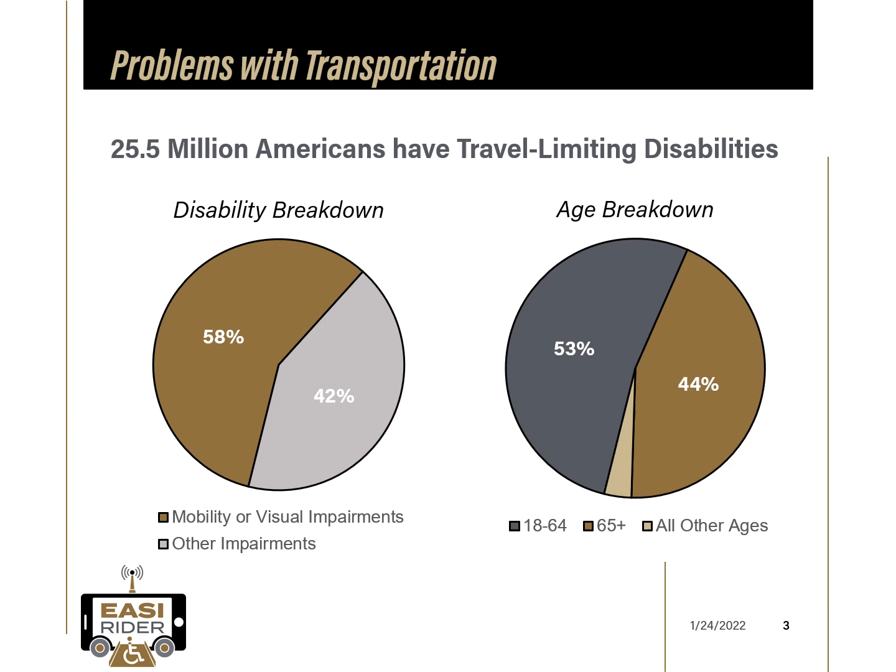There are 25.5 million Americans with travel-limiting disabilities. About 60% have difficulty traveling due to mobility or visual impairments. Both working-age adults and the aging population have difficulty with travel. The EASI RIDER project focuses on these demographic groups and what design solutions are needed to allow them to be independent users of future AV technology.

Autonomous driving technologies are the future of transportation, but they also present a lot of challenges in providing people with disability complete agency to this technology. We are grateful to work alongside the other teams to develop inclusive design solutions that will allow people with disabilities to independently travel wherever they need to go.

Our mission was to create an inclusive design that encompasses the entire travel experience for passengers with disabilities. This includes locating the AV, entry and egress, user-aware parking, configurable wheelchair securement and seating, independent operation of vehicle controls, and remote supervision for emergency situations.

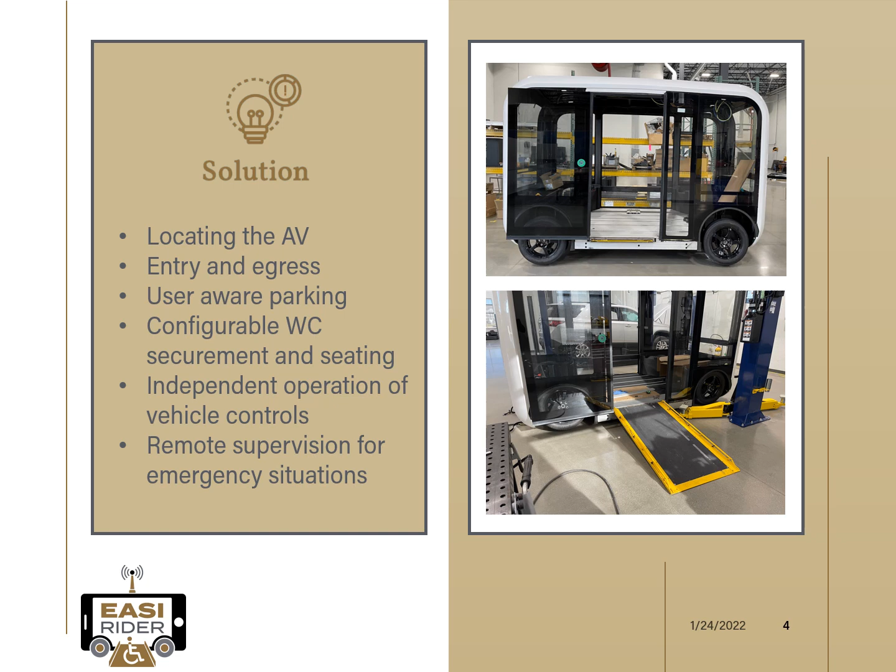To best achieve this goal, we are building a full-size AV platform with operational wheelchair-accessible door and ramp, smart seating, wheelchair securement system, multi-sensory operational controls, and state-of-the-art monitoring systems. The images on the right show the current progress of the AV. We have enlisted multiple partners to help us develop these inclusive design solutions, including industry members interested in improving mobility of persons with disabilities and nonprofit organizations serving the disability community.

There are 3 phases in our user-centered design feedback strategy. Phase 1 involved getting early feedback regarding AV usage among members of the BraunAbility Driving Force. The Driving Force was developed to answer different questions in regards to disability transportation. This survey was conducted in early 2021. From the survey, we found people with disabilities were more receptive to using autonomous vehicles than the general public. They also suggested specific design considerations that they thought were critical to incorporate into autonomous transportation.

Phase 2 is a targeted Qualtrics survey that we recently released to groups and individuals with disabilities or their caregivers. It was developed to inquire about their current usage of technologies intended for AVs and specific design solutions that we were considering. Additionally, we inquired about their current attitudes and expectations towards AV technology. The data collection for this survey is still ongoing, and a link is provided at the end of the presentation if you would like to participate.

During Phase 3, we will be conducting in-person focus group testing at the newly built BraunAbility Innovation Center in Carmel, Indiana during spring 2022. We are inviting key stakeholders, wheelchair users, and persons that are blind or visually impaired to personally test the different design features of our real-sized EASI RIDER AV platform that is currently under construction. These focus groups will allow us to better understand each individual's unique challenges during different travel scenarios. The following animations will show an overview of what the current design incorporates.

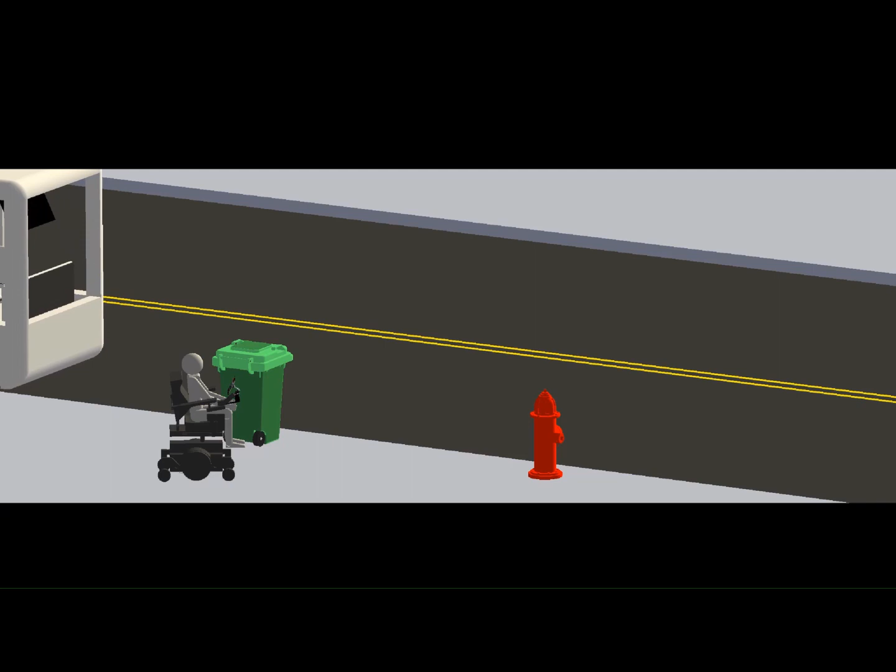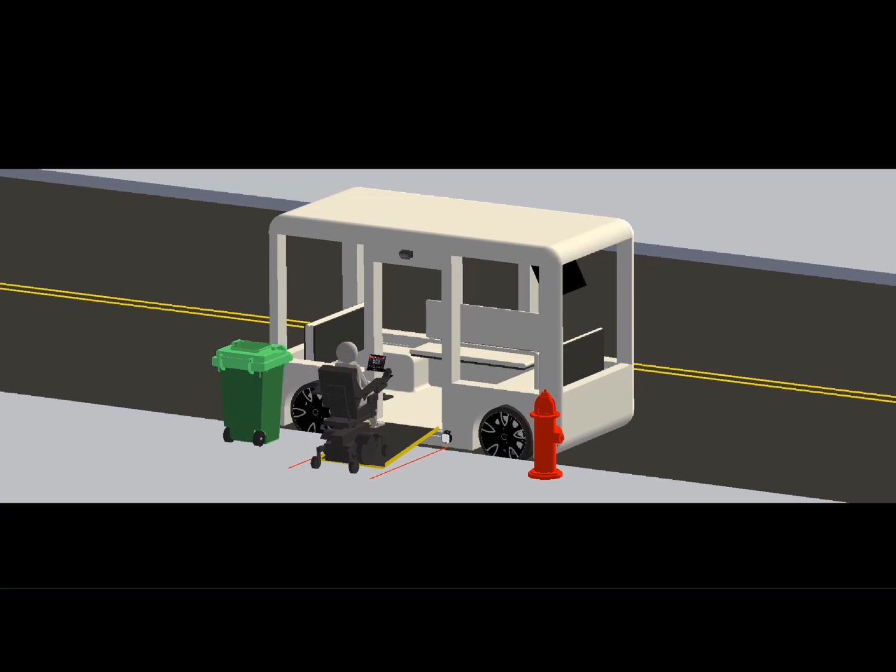Once the user hails the EASI RIDER vehicle, it will navigate to find an optimal parking location for safe entry and egress using state-of-the-art sensor technology and computer vision to determine the appropriate location of the ramp. It will indicate this location using laser guidelines and deploy the ramp. Once the ramp is deployed, either the front or back seat can be raised to show the wheelchair securement system. The wheelchair user can then enter the vehicle and begin to align themselves with the vehicle constraints.

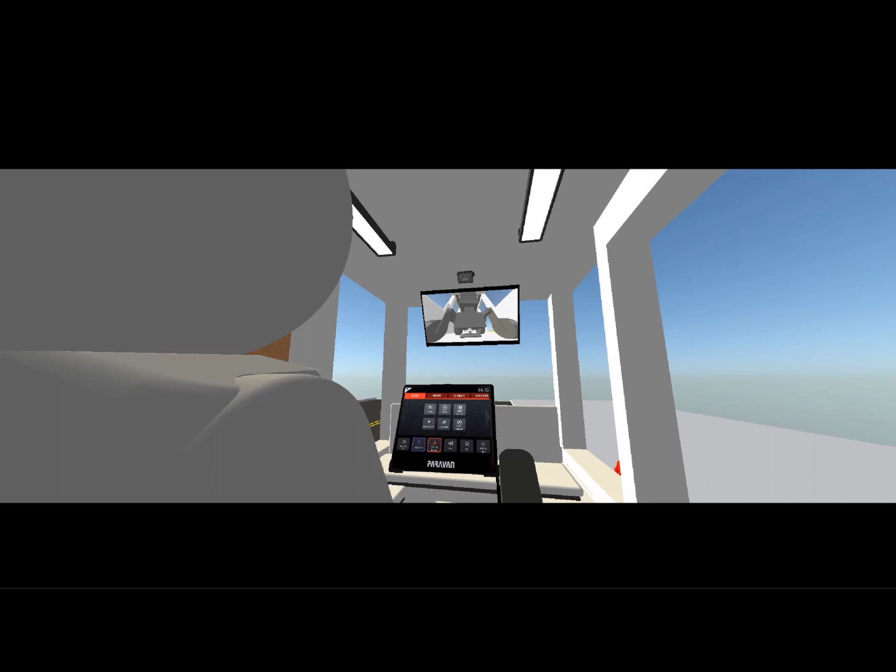Here you can see the user beginning to back up into the system. There is a camera that assists the user in backing up into the correct position. You can see how it looks to the user on the monitor at the front of the vehicle. Once the passenger is secured in the vehicle, the ramp will fold back up into the underbody.

Users will be able to interact with vehicle controls using our app. The app allows passengers to control secondary options, entertainment options, check route information, and in emergency situations, they can communicate with an operator. The operator has the ability to see what's going on and communicate with the passengers using the camera positioned at the front of the vehicle. Once everyone and everything is ready to go, the vehicle can begin to travel to the destination.

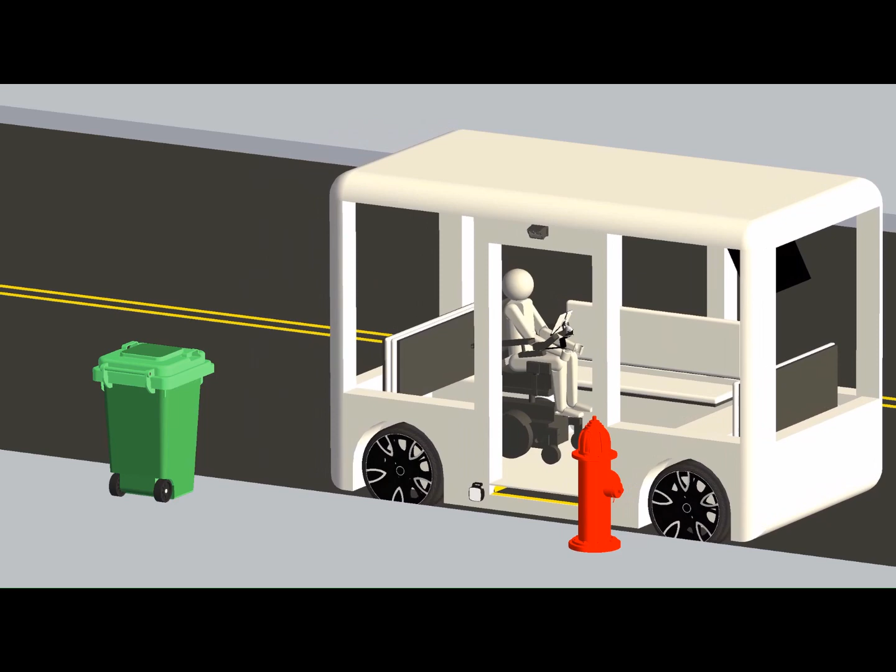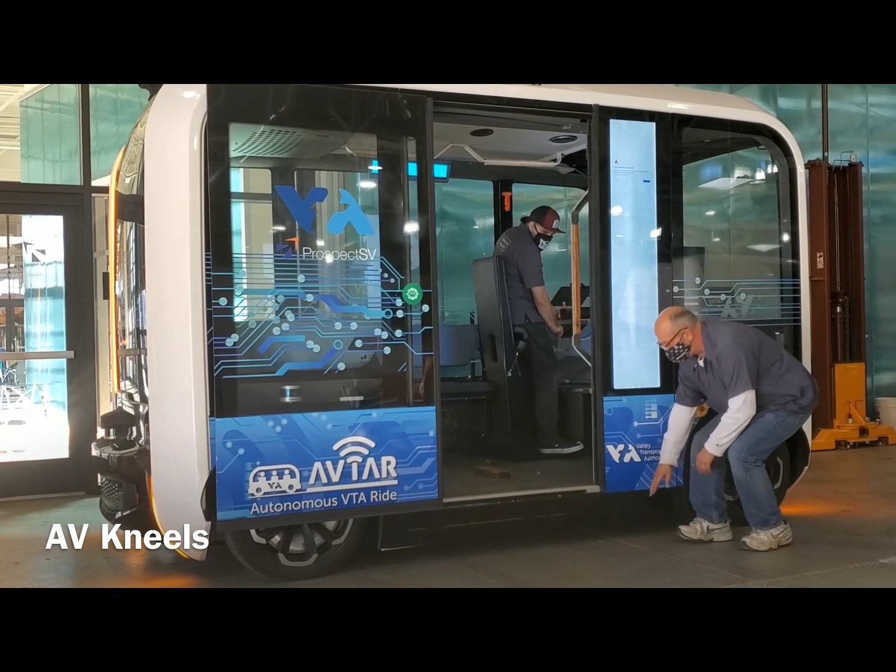This video shows the Olli AV platform in action. It has the ability to kneel to provide easier entry and exit for the passengers. It is also fitted with an innovative ADA-compliant BraunAbility ramp.

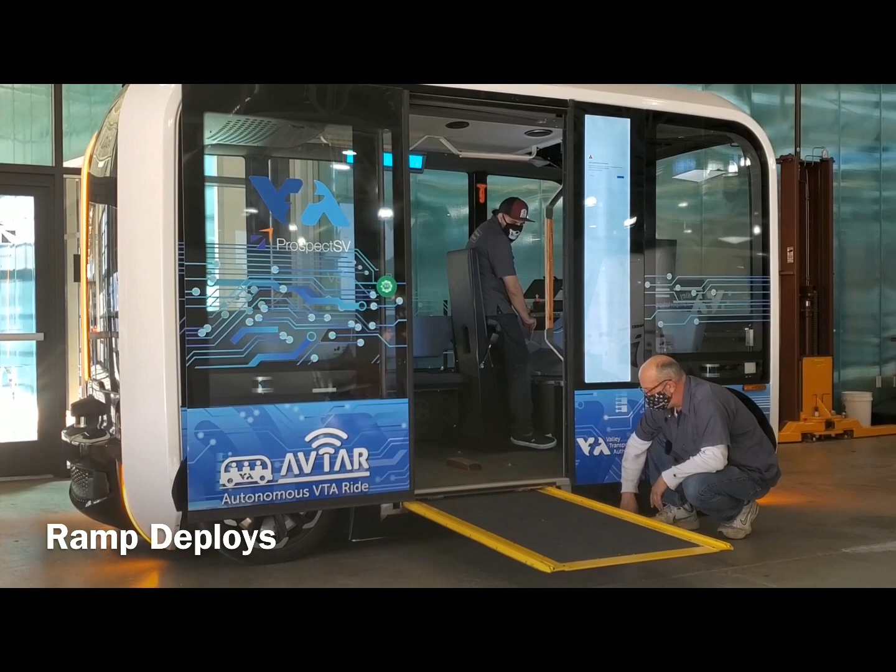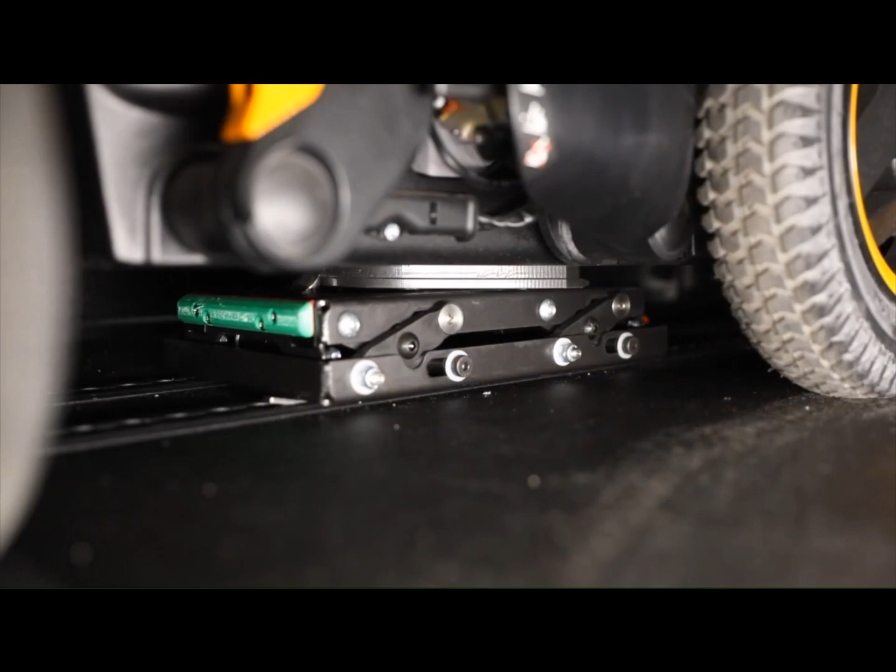The BraunAbility wheelchair securement system adjusts in height to accommodate different wheelchairs, from power wheelchairs to manual wheelchairs. Once the passenger is in the system, the cinching mechanism secures the wheelchair in place and ensures a safe ride for independent operation. Here's a second example using a manual chair.

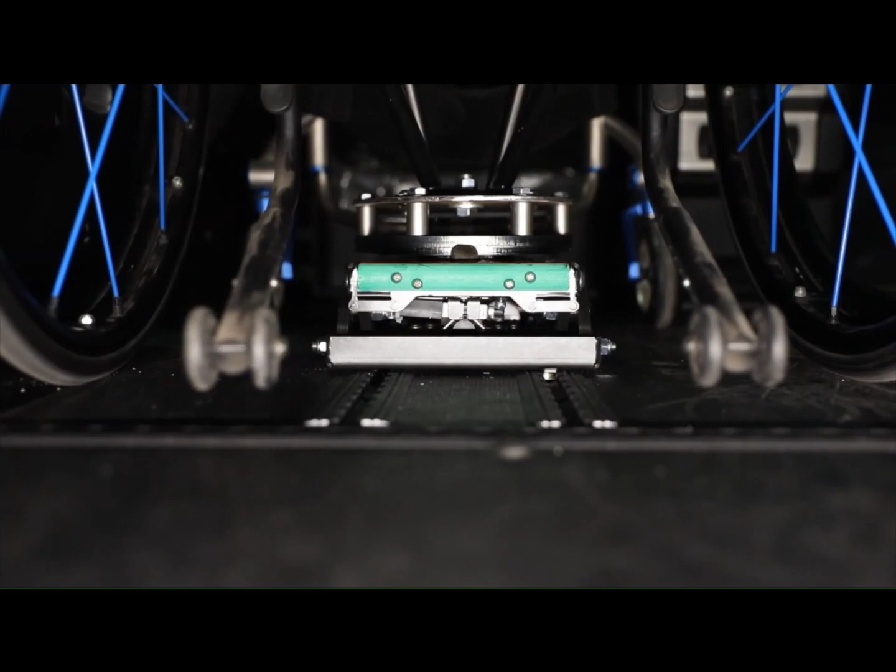There are many different passenger seating arrangements that can occur in the vehicle. In total, we have incorporated 3 different seats, one in the front, one in the back, and one on the left side of the vehicle. The front and back seats have the ability to lift up and reveal the BraunAbility wheelchair securement system. With 2 systems, the autonomous vehicle has the ability to assist 2 wheelchair users to their destination. As seen in the previous video, both power and manual wheelchairs can be secured into place.

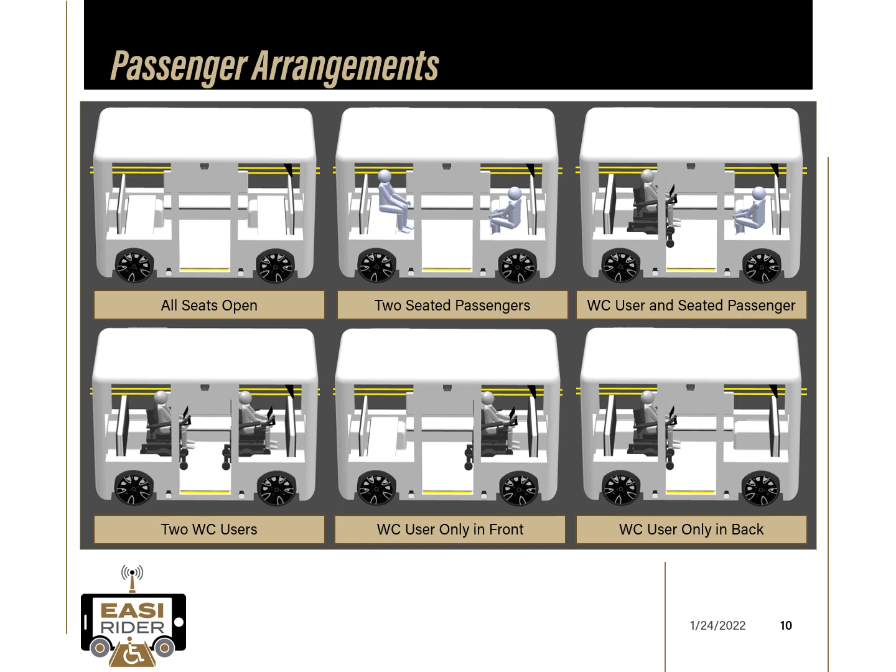Different combinations of seat position can allow for, but are not limited to, all of the seating arrangements on the screen. Passenger preference is important to us. We want to ensure everyone who enters the autonomous vehicle has a safe and comfortable ride.

The next steps for the team will include conducting those in-person focus groups at BraunAbility, determining points of uncertainty based on the data from the survey and the focus groups, improving the overall design of the EASI RIDER final prototype, and finally, analyzing product findings and compiling summary documents to present at the 2022 US DOT Design Challenge.